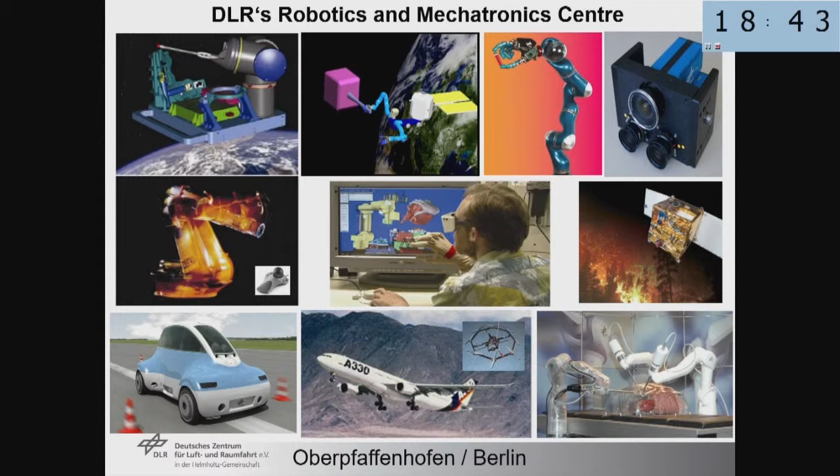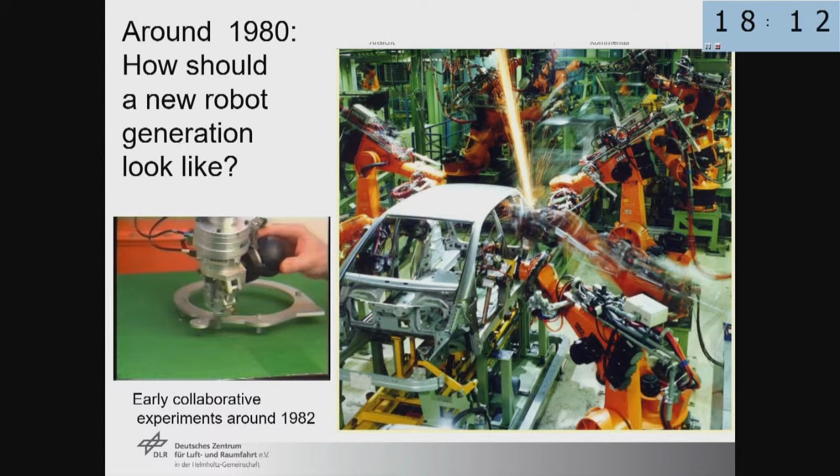Already in the early 80s, we saw that robots in the factory were behind fences. They had no sensing. They were stupid devices. We tried already at this early stage to develop robots which collaborate with humans. So we developed force sensors and force balls where we could guide the robot and show how it should press against a contour. More natural programming.

Important at that time was Neville Hogan in USA. I think he was the first one who defined the topic of impedance control, that is shaping a robot such that it should react like an artificial mass, an artificial damping, and an artificial spring. And you can do this with a force sensor at the robot wrist, if you have such an arm, and you just apply appropriate feedback.

Most well-known became Whitney's resolved rate control, where you set mass and stiffness to zero, and then you get a proportional relation between the force exerted and the velocity. So you can guide the robot around by taking it just at the force sensor.

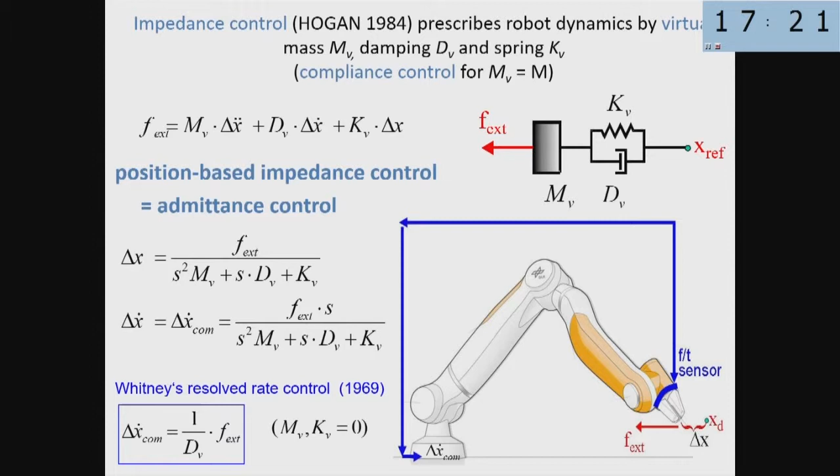Nearly at that time, we tried to define a paradigm for future autonomous mechatronic systems. You start with the intelligent motion planning. It may come from a human, or from the machine itself by using sensory information, and then you generate from that a desired motion, described as an acceleration profile, because acceleration is the mother of all physical motions - not positions, not velocity, but acceleration. And then you apply inverse kinematics dynamics model as far as you know it.

You get the nominal control commands, you put it to the real system, you have the system dynamics, you get the real motion, and you compare then the desired motion with the real motion, as you can see underneath. There will always be differences, and you have learning control algorithms that generate corrections to the commands, and on the other side, adapt permanently the model.

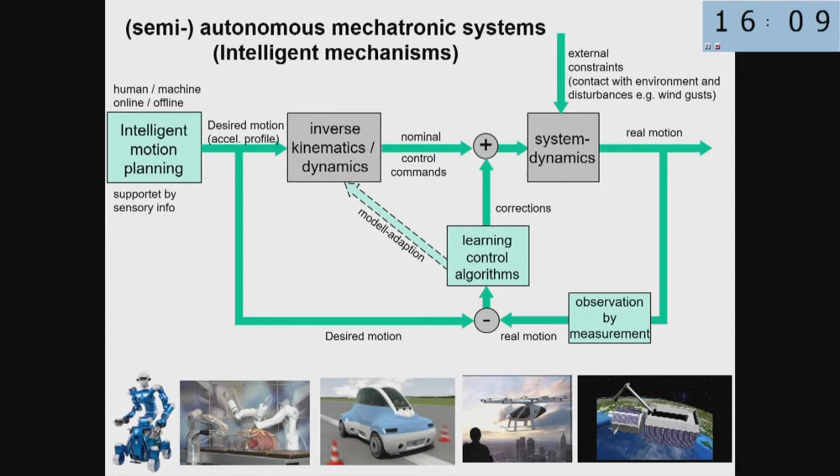This is a very general principle, usable for robots, for cars, for flying systems, for everything that is moving. And the first step then was to apply it to robot systems.

So we said, okay, desired acceleration, we need the mass matrix, inverse dynamics and kinematics model, and then we need torque control in the joints, because these are the real input commands we have - no position control, no velocity control, just joint torque control.

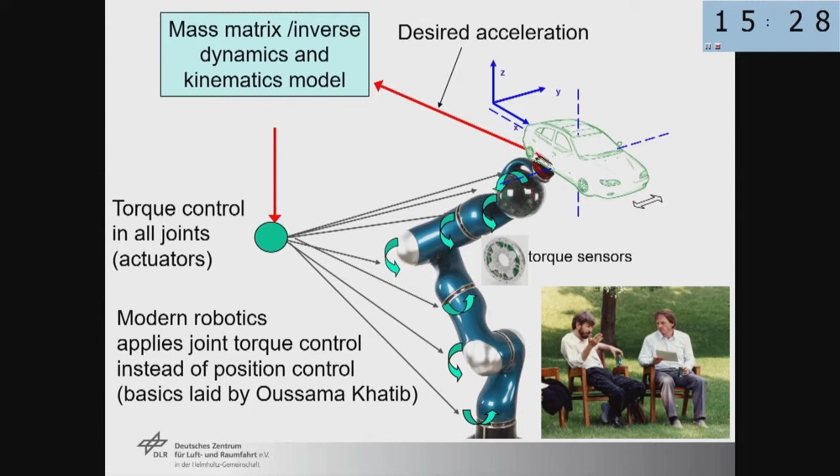A lot helped here Oussama Khatib from Stanford University, who had the first ideas in this direction also, and we had many, many discussions and said these should be the robots of the future. And indeed, I think we were the first ones who could realize this principle, when we saw that with a few lines of code you can generate completely different behavior.

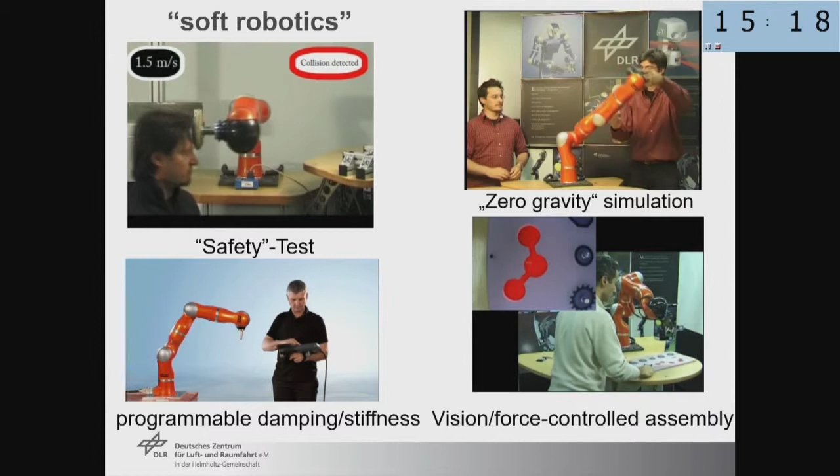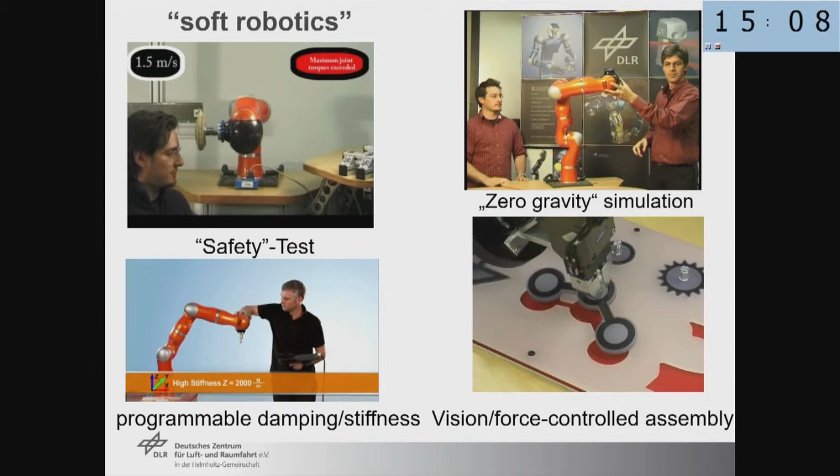Robots are absolutely safe, they compensate gravity, and if you provide them with vision, then you have more or less human performance, tactile and vision control, and we made contests with children.

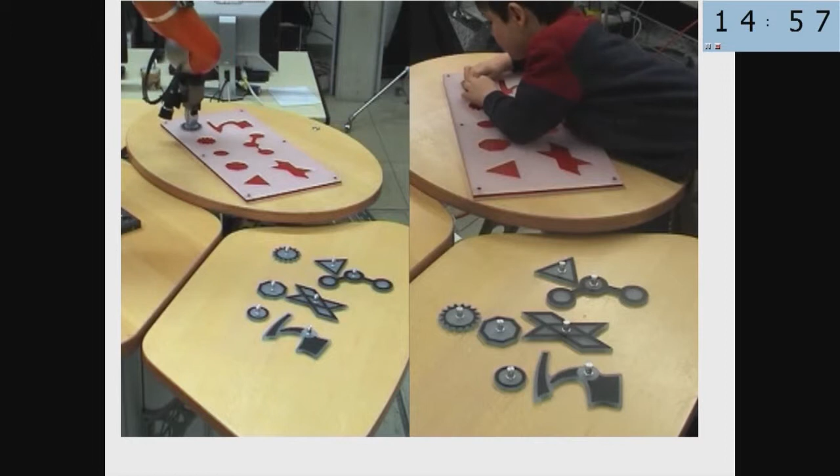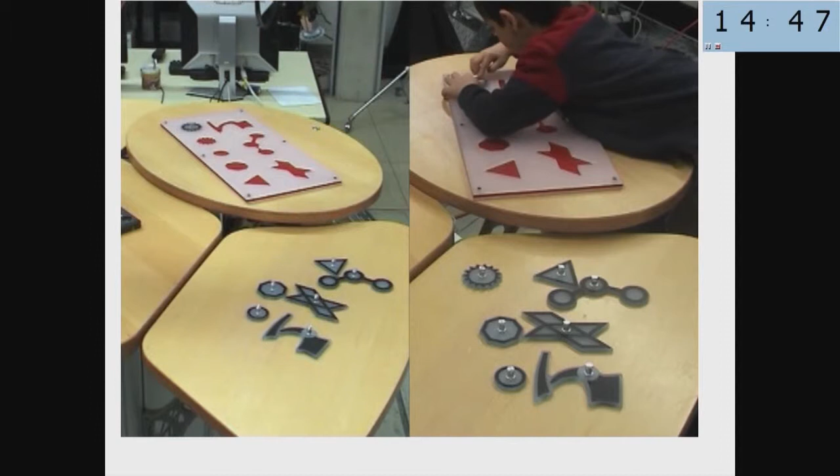For example, we have two tooth wheels which have one tooth difference, and the young guy cannot discriminate which is the right wheel, but he has now the idea it might be the wrong one, and the robot has seen it on the first glance. But then the young guy becomes faster and faster, so he is superior then to the robot. But it's not - it's just an

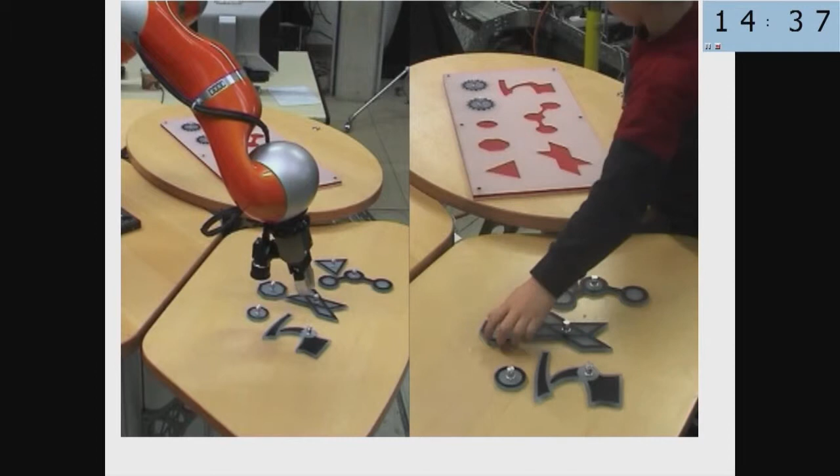intermediary stage. I think next year at the Automatica in Munich, we want to show that the robot does these insertion tasks faster than any human can do. We want to make a competition on that.

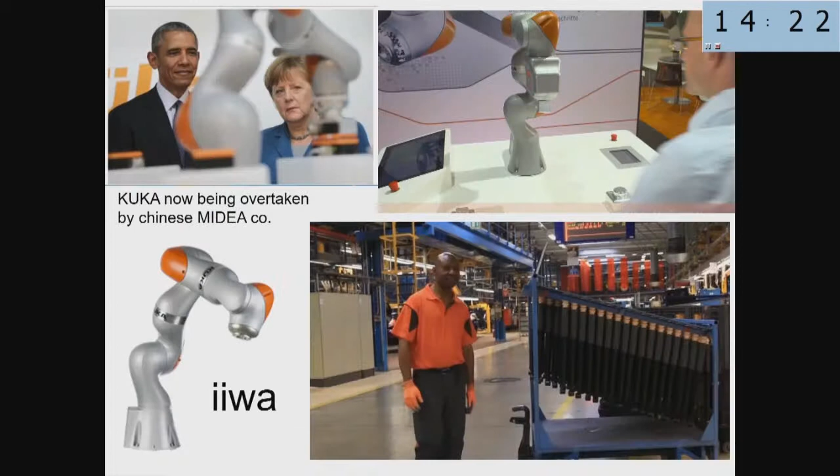Daimler was the first one who said, well, we need these cooperative robots without fences in our factory, and they assembled more than 1 million rear axle gearings with these cooperative robot systems.

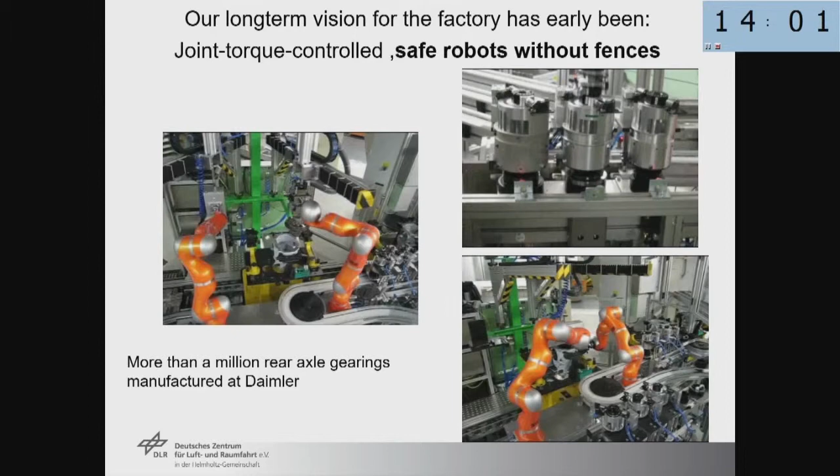And robots on a Ford production line, the company was very enthusiastic about this one, really special. He said this is a new guy, one of the first in the world to work hand in hand with assembly line staff at a car factory. The device is so clever it learns how to help you on the job, thanks to high-tech sensors that can feel when you're standing next to it.

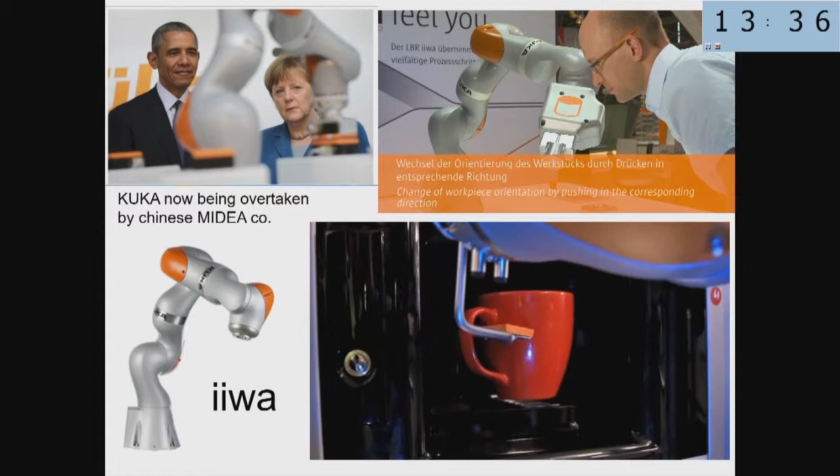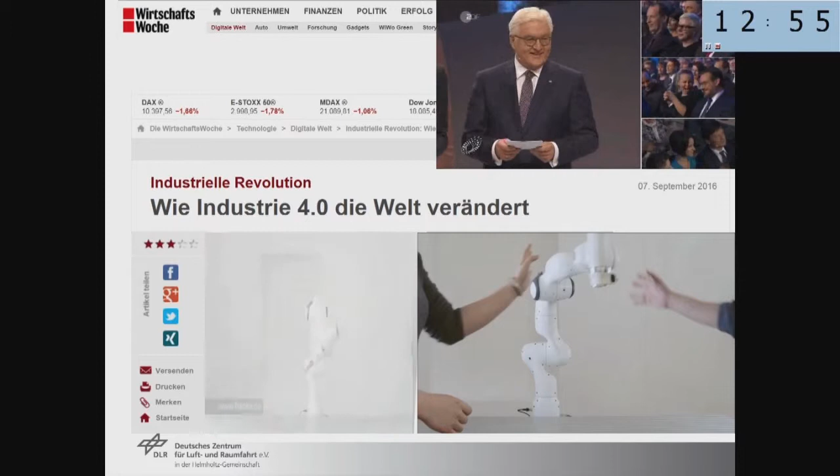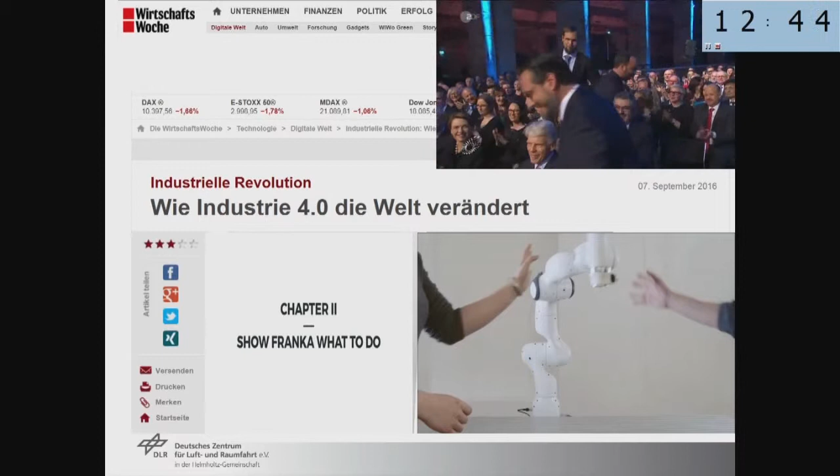So it was, but everyone said this is very cheap, 80,000 euros or dollars. And then my young co-worker Sami Haddadin developed a version which is 8 times cheaper, about 10,000 euros or dollars. And he won the German Future Award 2 years ago.

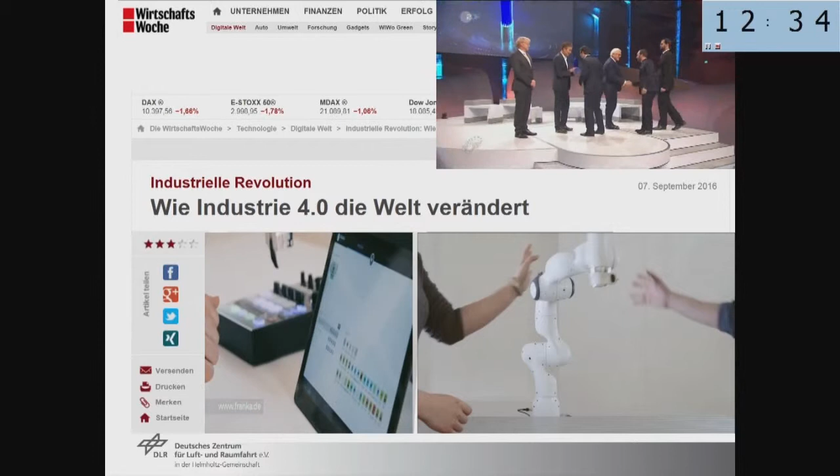And since then there's a lot of emotion about these robots. The Japanese Premier Abe pointed it out when he came to the computer fair in Germany, and we have a lot of fun with that kind of robots. They are easily programmable. They are going now to schools where young children are already programming them, and you see the idea here is learning.

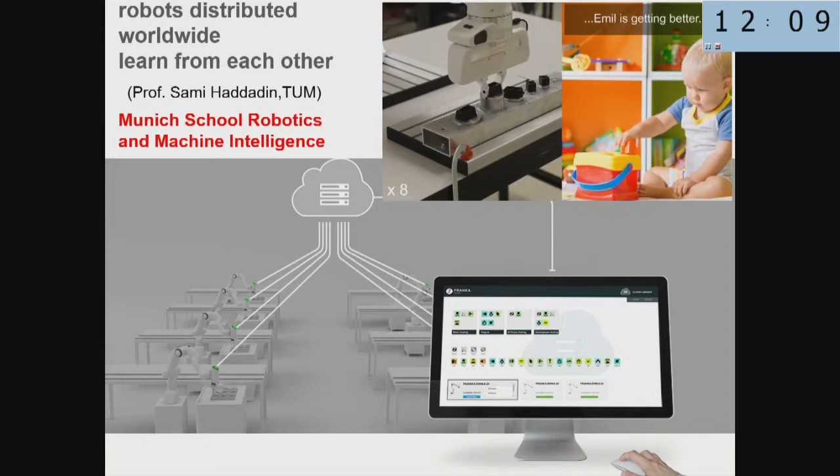Like a child, you test it again, you try it again, and finally the robot is able to insert the part, and then it tells all the other robots worldwide. The knowledge is not separated, it's distributed worldwide.

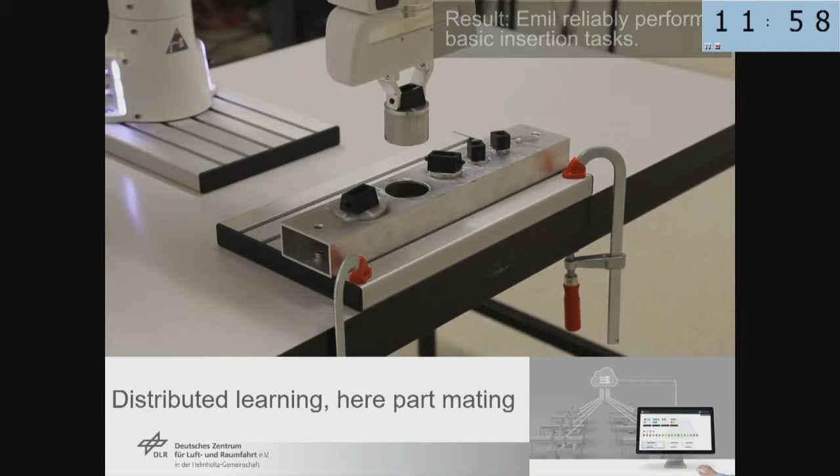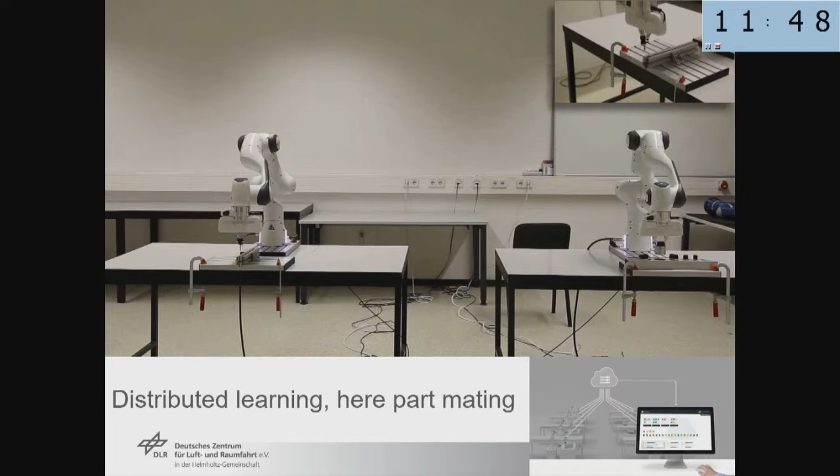And there are many other robots, for example, they do different tasks, like opening a door with a key, and immediately they have learned also to insert this key, and they can do a different task with this knowledge from the one who has just done the peg-in-hole before.

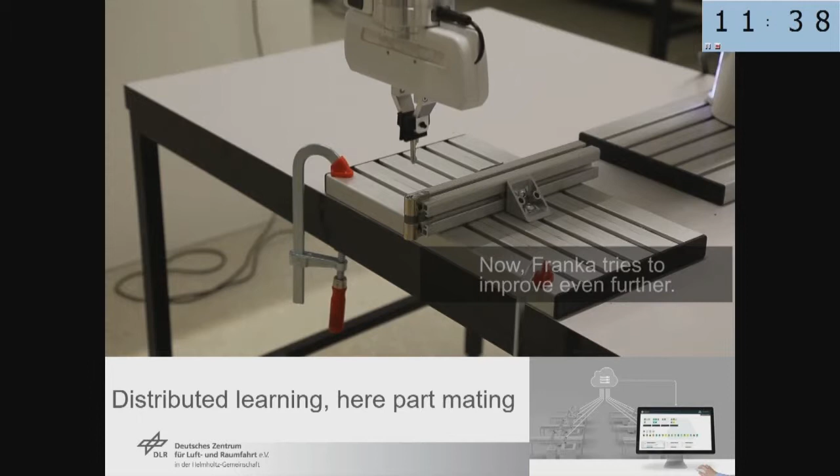So this is shown next week also to the German Chancellor. She is very interested in these kind of things, and there's a big motion at the Technical University there.

Of course, these robots address these kind of working places. A huge number of women, 80,000 for example, at Foxconn and other companies, who are doing the whole day nothing else than pressing buttons for our iPads and iPhones and so on. And you can discuss a lot whether this is useful to replace these working sites, but they will be replaced anyway.

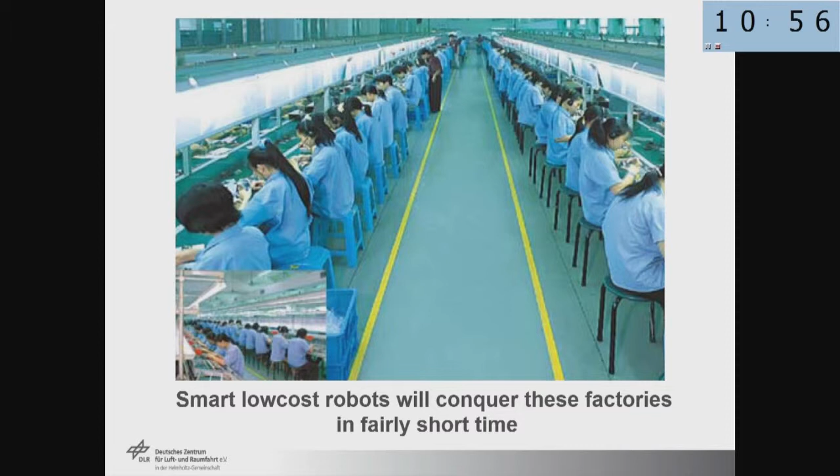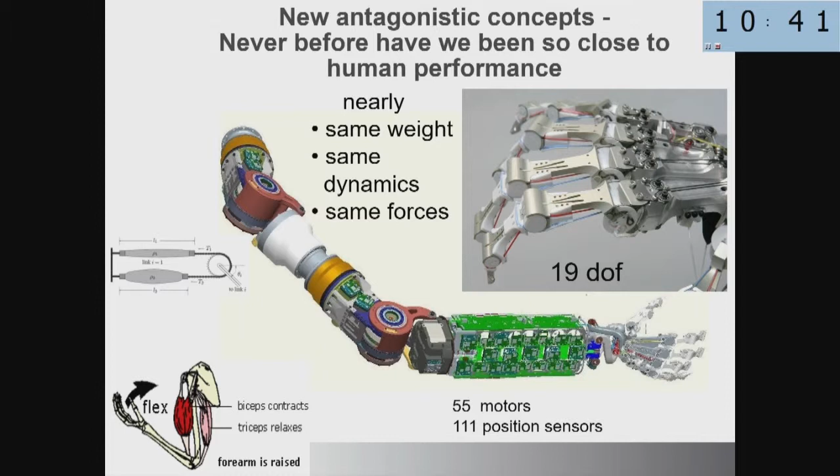We developed also more complex systems like the triceps, biceps concept, where you have 2 actuators like in the human muscular system, but then you need a lot of motors. We had 55 in this arm, but we get low weight nevertheless and very elastic or compliant behavior.

And you have typically, in the simplest version, 2 motors again, but one is changing the stiffness, one is doing the motion, and if you leave away the second motor, then you have the serial elastic joints, where the universal robot system, which is widespread, is using this concept.

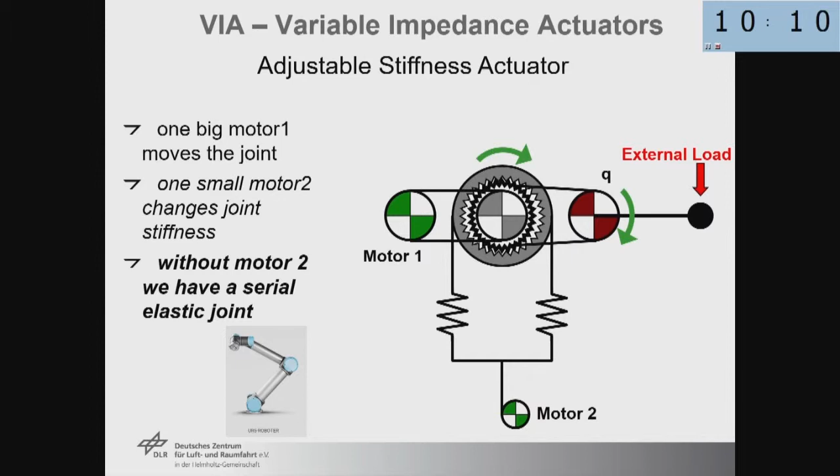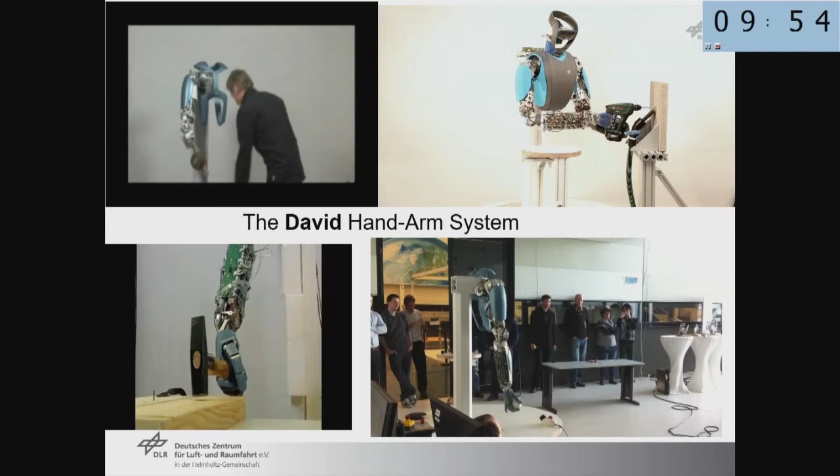The hammering like that, or this energy storage like in the right lower video, unfortunately it does not run now. Can you start it on the right? No. But drilling and so on, you need this kind of compliance, it's very important. Unfortunately, throwing the ball is very elegant, you cannot see it, because the video does not run.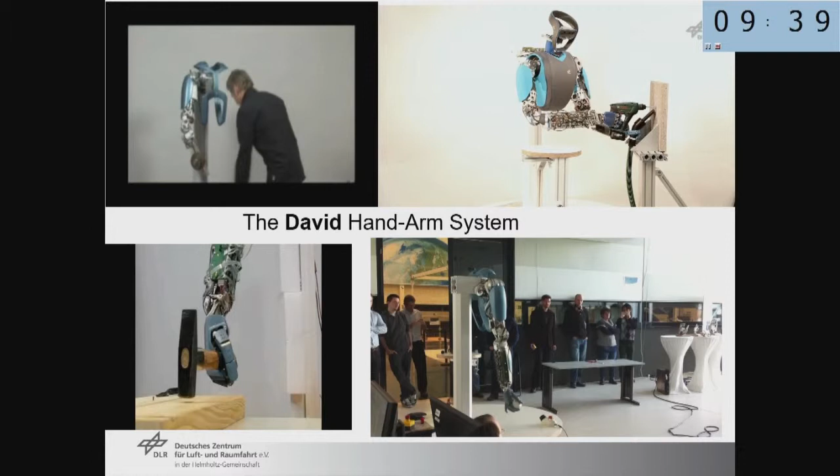There is a lot of demonstrations how robots in the future should help humans, like preparing tea for elderly, body control, and dexterity.

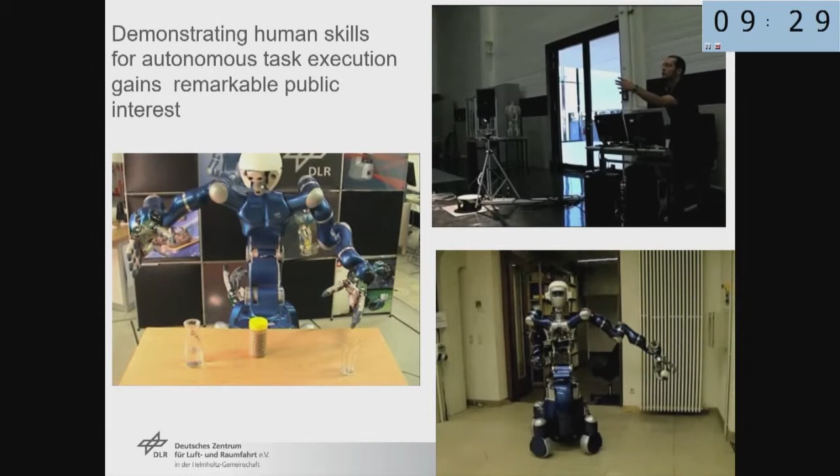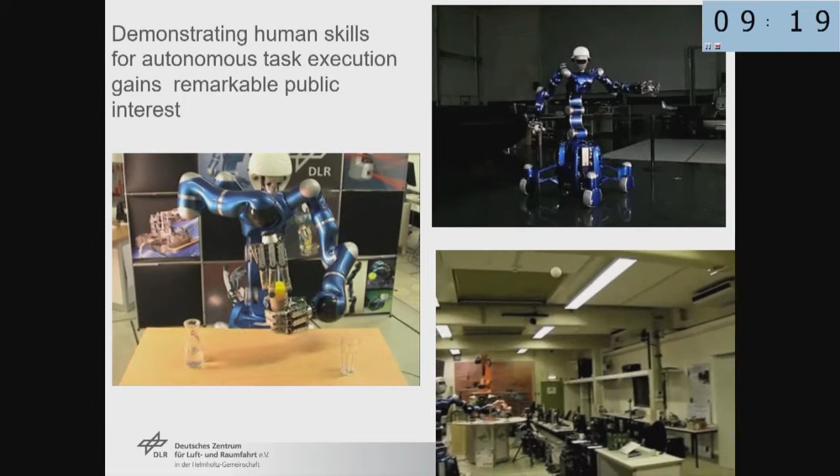Catching a ball - it's just skills which a robot should be able to do. One is throwing a ball, the other one is catching it. On the upper side you can see it's catching two balls simultaneously. Try it yourself, or with your children, or grandchildren - it's not so simple despite appearing that way.

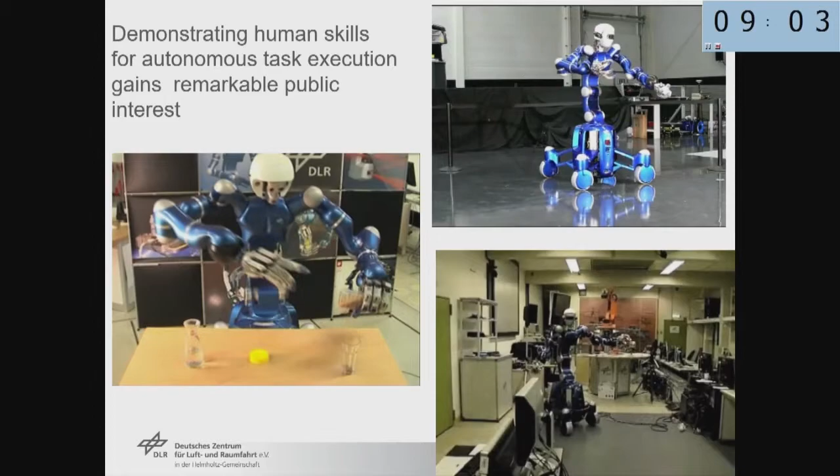There are challenges of vibrations, elasticities, and distributed sensors. People are very much interested in these kinds of things. But the learning, of course, is very interesting.

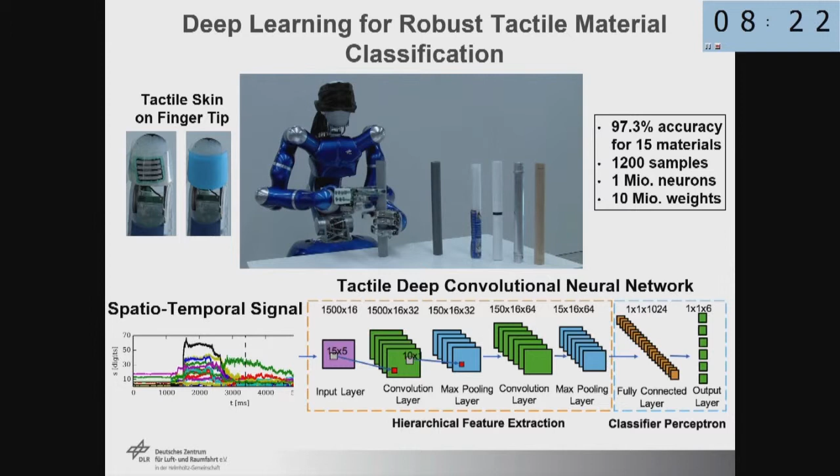We made experiments with altogether 15 tubes with different surfaces. The robot has simple tactile sensors in the fingers - it can test them by just touching and moving them around. Then we close his eyes, which is just more of a gag because we can switch off the vision system. That should be cloth and paper. Indeed, the success of the robot was higher than all of our co-workers in the institute - he was better at discriminating the materials than all our colleagues.

Nevertheless, with artificial intelligence and teleoperation, telecontrol with haptic feedback, we are talking about the tactile internet being important. We have shown that we can repair a pipeline or an oil platform in Korea. The delays of the fast internet are only half a second, and up to this half second we can compensate the tactile delays, which can make things much easier.

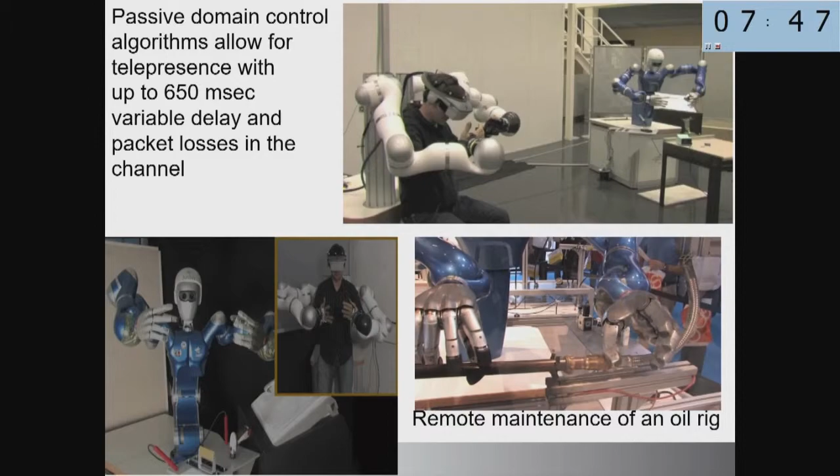Interestingly, a Russian cosmonaut on the space station had a joystick, a force-reflecting joystick. He controlled one arm of our Justin, and his wife in our laboratory felt his pressure and pressed against his arm. He had been half a year already on the space station, and she started crying - it was so emotional for her. I did not expect that.

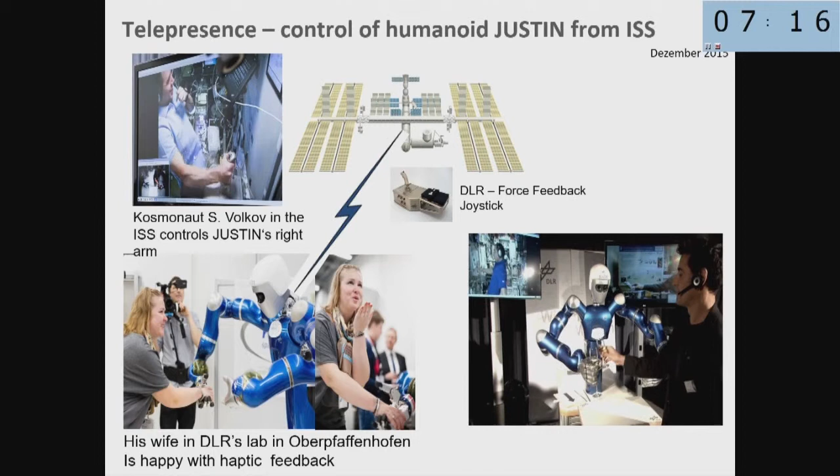From that experiment it became clear that we can now shake the hand of our grandfather in Australia, or in whatever place in the world. This is one of the interesting impacts.

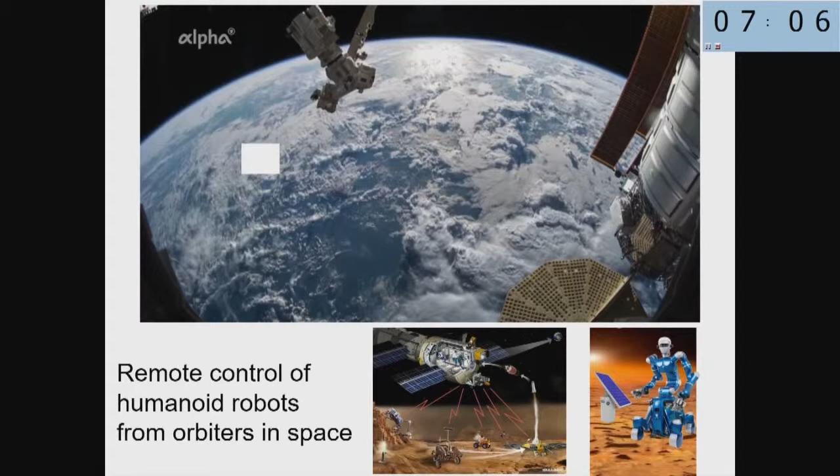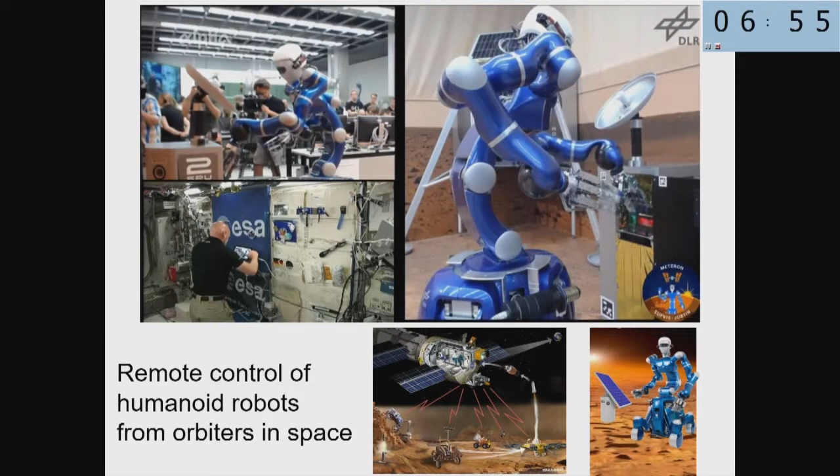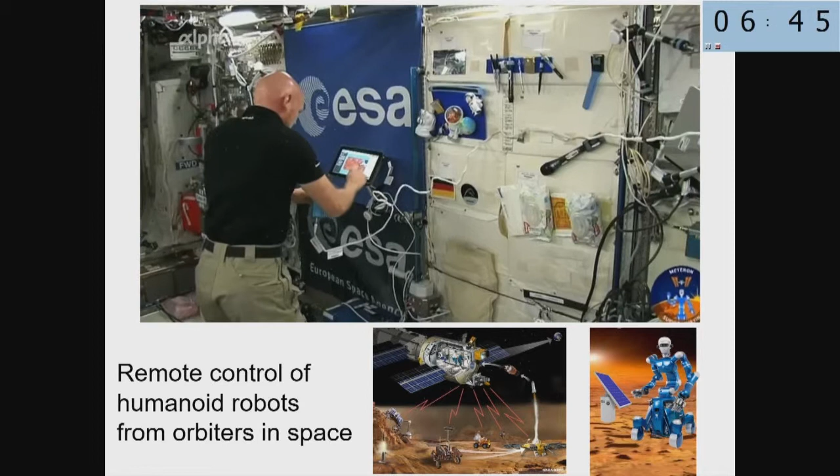Then the most popular astronaut in Germany, Alexander Gerst, did these experiments from the space station down to our lab. He had some training, not much, and our co-workers made a joke - they let it smoke, and he was surprised and said 'what happened here, it's smoking!' Our colleagues said, 'oh please take out the box and put another box in, there might be a big fire.' And he did it without training.

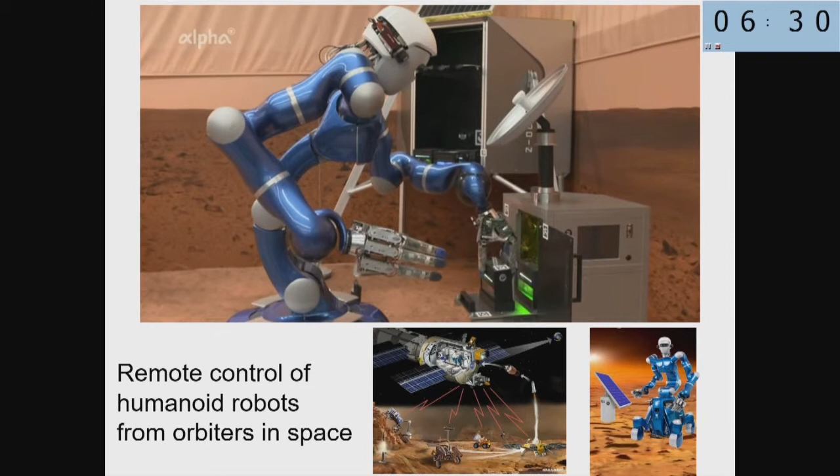So the idea is that later on, astronauts circulating around Mars will first send robots down to the Mars surface to let them build up habitats and so on, not landing at the first stage, because return from Mars is very difficult.

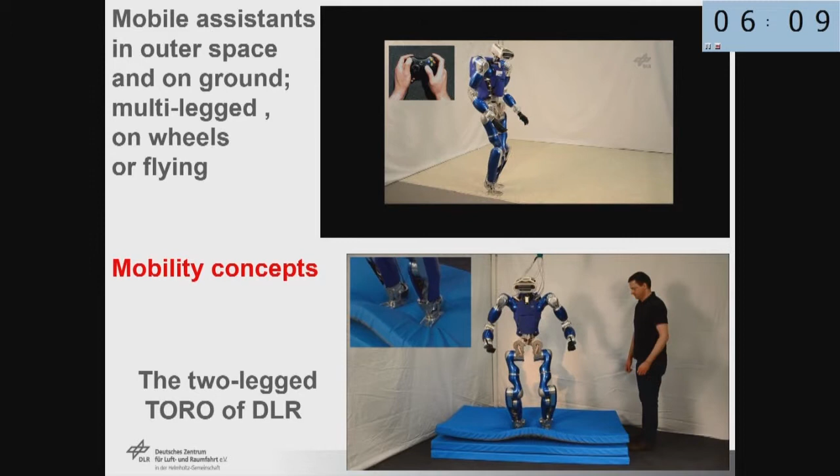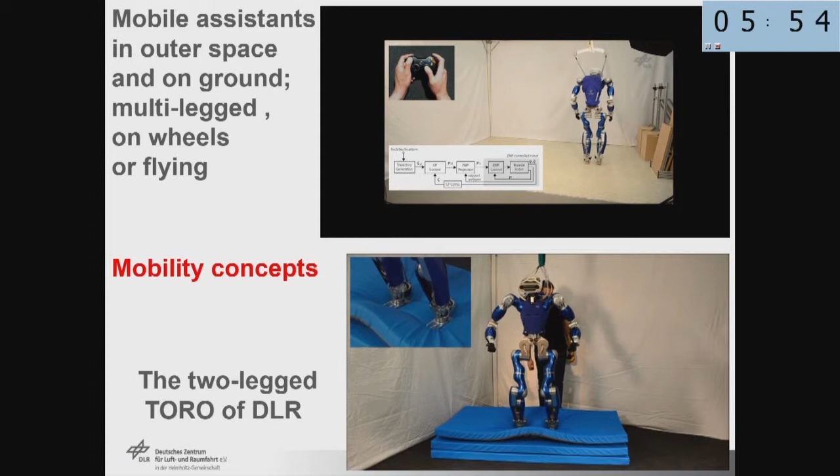Now, mobility concepts go further. Legs are important, and to be honest, we are not the champions in all areas. We are really far ahead, but concerning multi-leg systems, Boston Dynamics is the champion. Nevertheless, we have beautiful mobile robots in Europe, in France, NAO and Pepper.

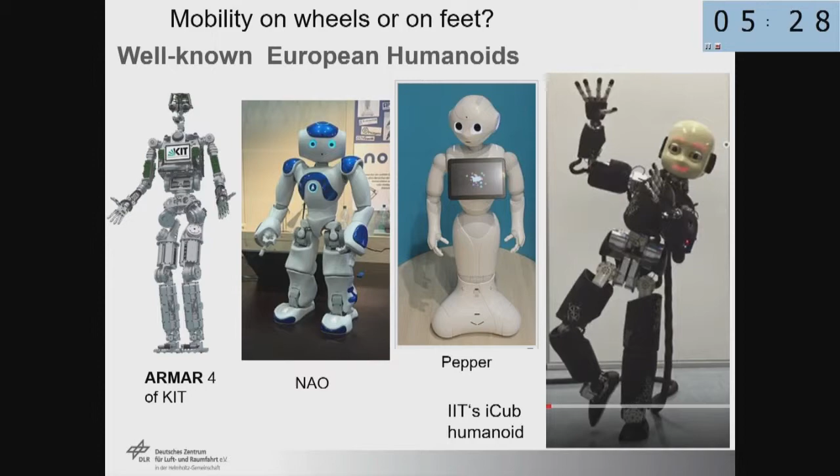A lot of people think Pepper is useful for elderly care, but it cannot help so much here. On the right side you see the Italian development, the IIT's humanoid or so. But the champion is Boston Dynamics.

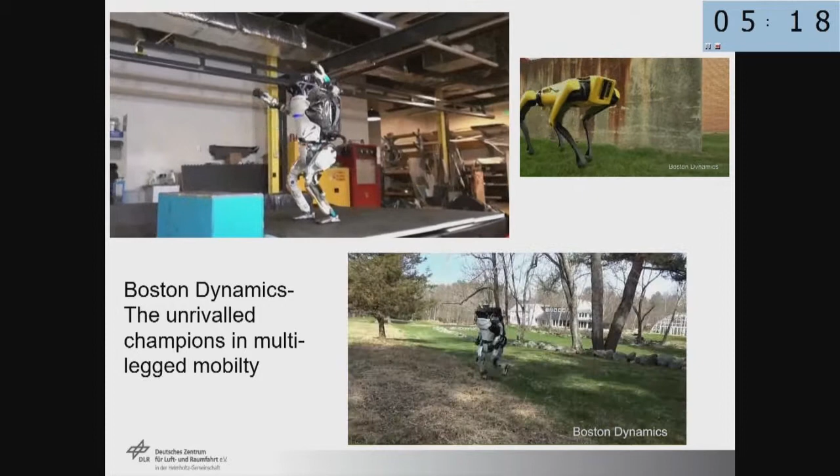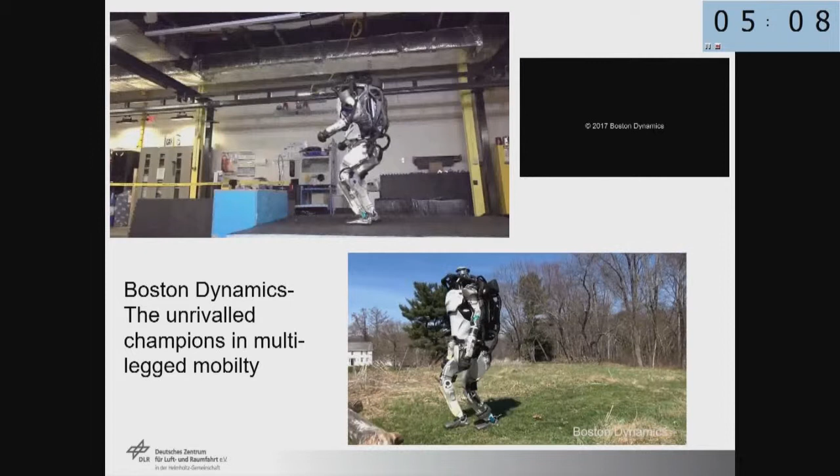They use electrohydraulic systems. On the top right, this dog, this Spot Mini, uses our motors, a pure electrical system. So for us the question is, can electrical systems be really as naturally compliant as these electrohydraulic systems? But I think Boston Dynamics is really the leader here.

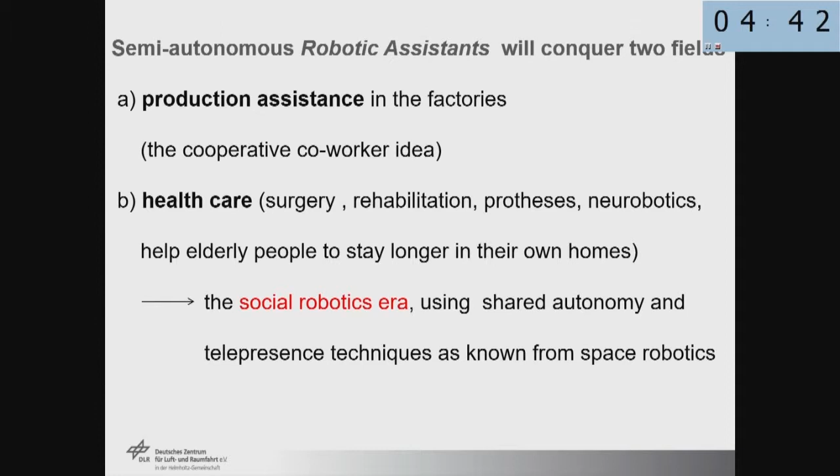Now we have a big initiative in Bavaria, pushing forward assistive robots - on one side to production assistance in factories, and on the other side to healthcare and social robotics, helping elderly people stay longer in their homes, rehabilitation, prosthesis, neurobotics.

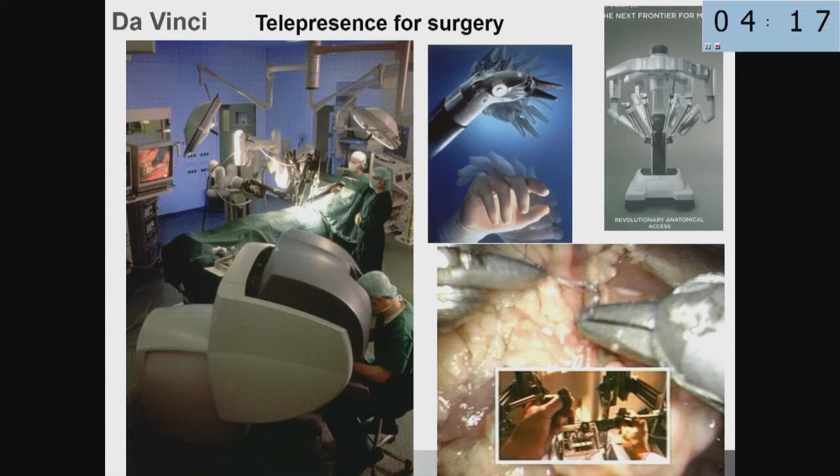You all know that in most big hospitals, operations are made by robotic systems. The Da Vinci robot is a big success, transferring the motion of hands into the interior of the body, and many clinicians operate only with these robots. We had developed a much smaller system, but we did not find a company in Germany that dared to take up the fight against the Da Vinci system.

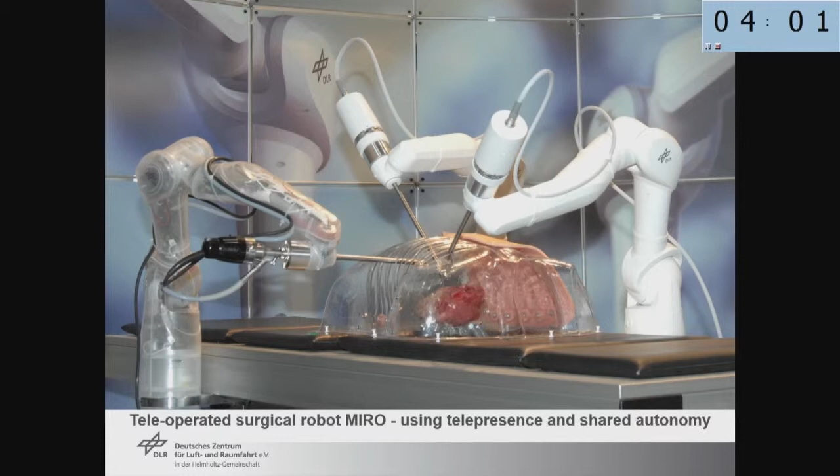Now Medtronic, a big American company, has the system in license. We will see how it will turn out, but my big hope was always the operation on the beating heart. Everything is available now - you can automatically servo the robot systems so the surgeon sees apparently a system at rest. Next steps are tactile feedback and automatically binding knots and threads and so on.

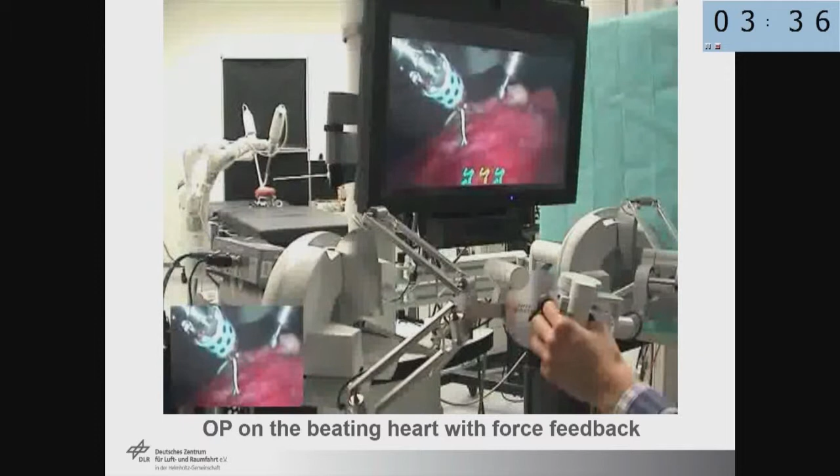The topic that interests me most at the moment - I started a big initiative in Bavaria with a school of geriatronics in Garmisch-Partenkirchen, which is a ski resort, as you may know, but has an over-aging society.

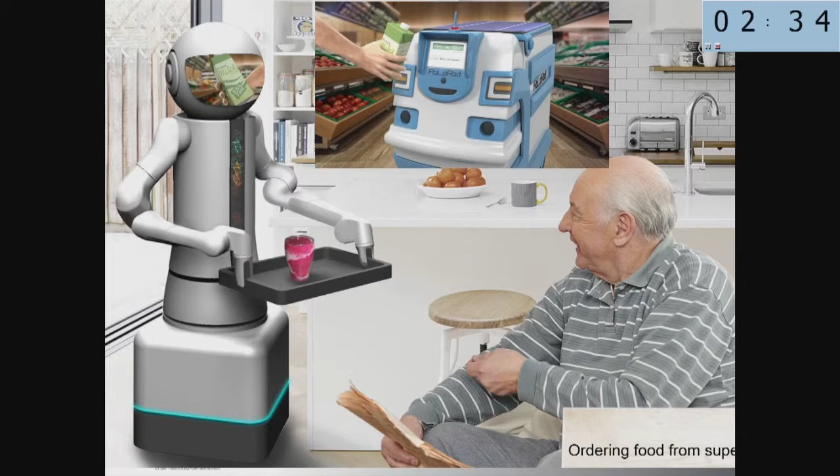The idea is to have two-arm robot assistants which make communication with children and relatives much easier, and which prepare simple meals - not complete complex cooking, just simple meals. They process vital data and only call the hospital if there is a danger. Old people are no longer necessarily sent into an old people's home if they do not want to. And ordering meals from the supermarket or the grocery uses what we call an automatic small vehicle, like a bicycle - you just order milk or whatever, and it is sent to you.

So a lot of help. All the things are basically available. We just have to do them now.

The relatives can control the robot, for example, if it doesn't succeed in lifting up glasses, or if a more complex problem occurs, then the control center, which will be in Garmisch-Partenkirchen with experienced controllers, has force feedback. They can also help.

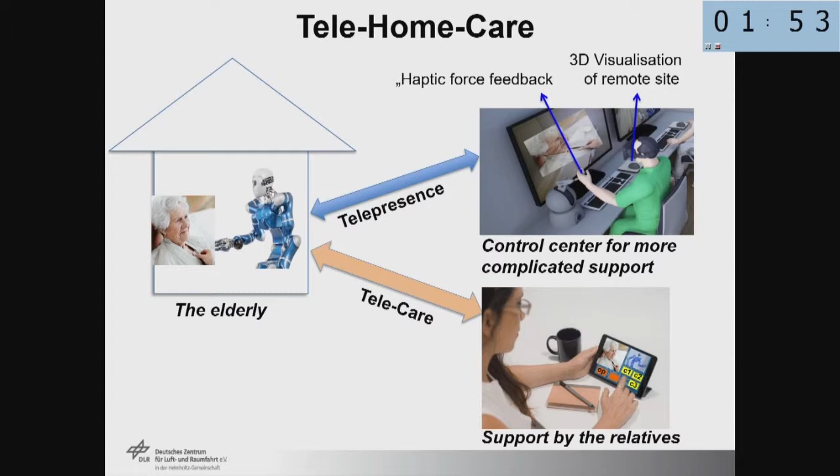The robots can shave people, as you can see, and they can also do ultrasound.

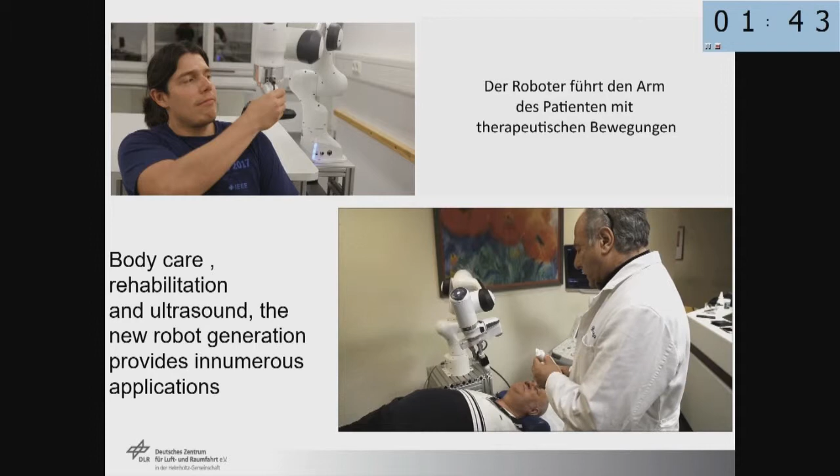I will not show it too long. On the other side, rehabilitation is a big topic for robotics. The physiotherapist comes only once, half an hour per day, and the robotic system should do the rest.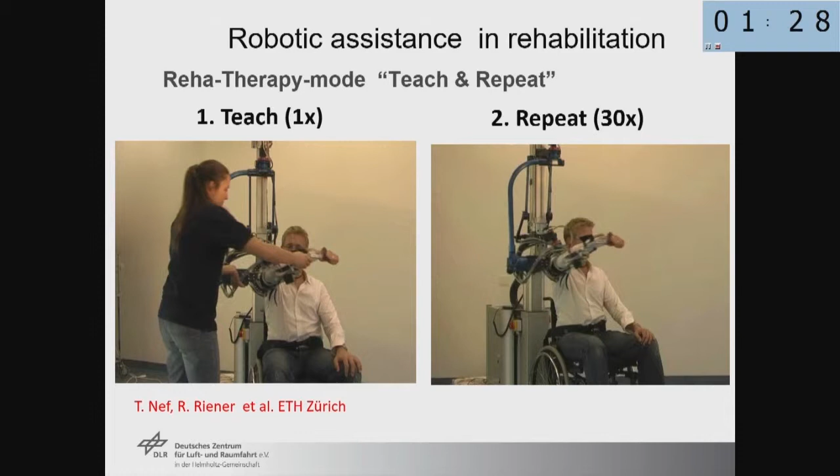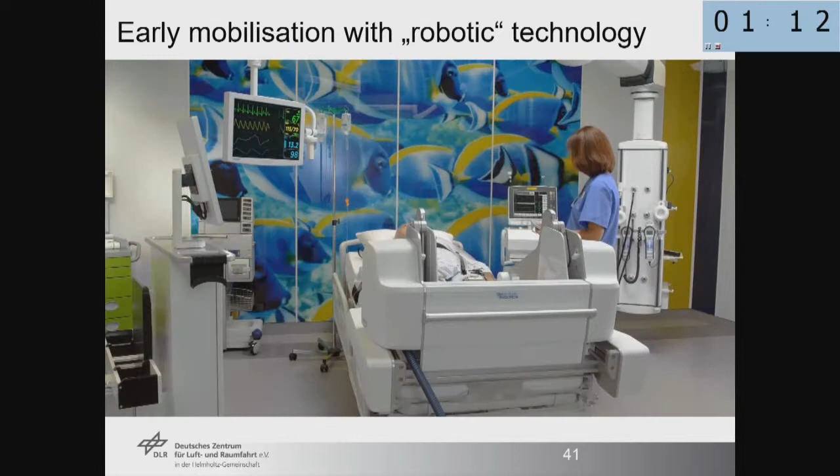We are just now introducing in the hospitals this kind of early mobilization, where again the physiotherapist does the motions once, and then the patient can by himself start moving his legs, and can also make the bed move into an upright position so that the blood goes into the legs.

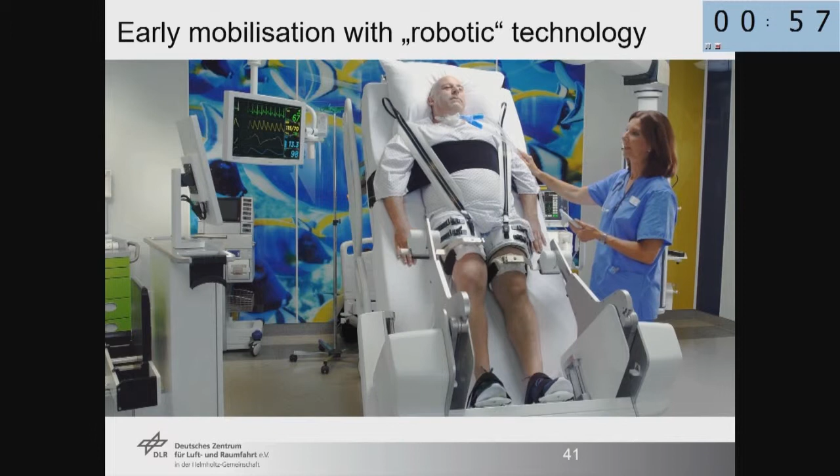So a lot of means to let people stand up again earlier - they're lying too long in their beds without motion. This is happening just in the hospitals in the next weeks, so it's interesting.

And of course, interesting are also - unfortunately the video does not run now. This is one of the most interesting videos. Can you start the video?

This experiment was done in the USA, at Brown University - we were not allowed to do it here. It uses 80 contacts to the cortex, and after 20 minutes of training, this lady, who has been paralyzed from the neck down for 15 years, was able to drink by herself. That was one of the most amazing and satisfying experiments in my professional life. You can see her face and how happy she is. This, in my opinion, is the future.

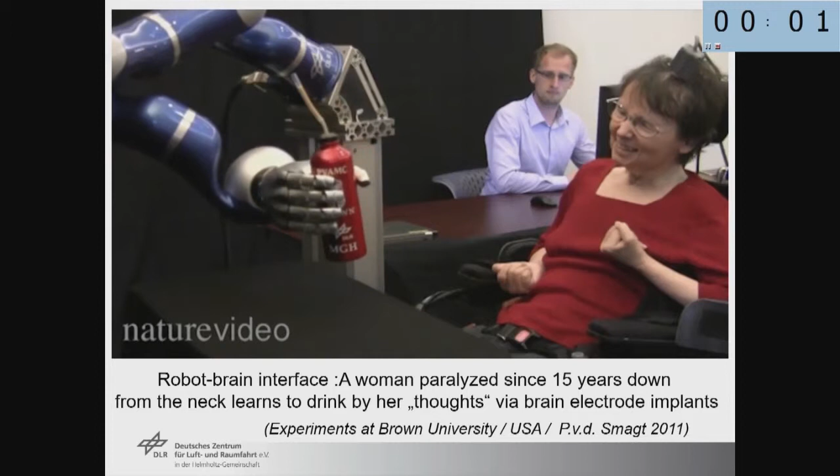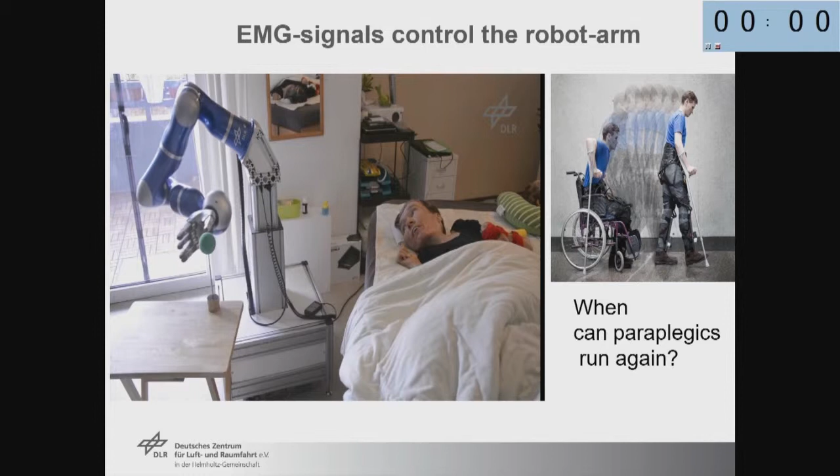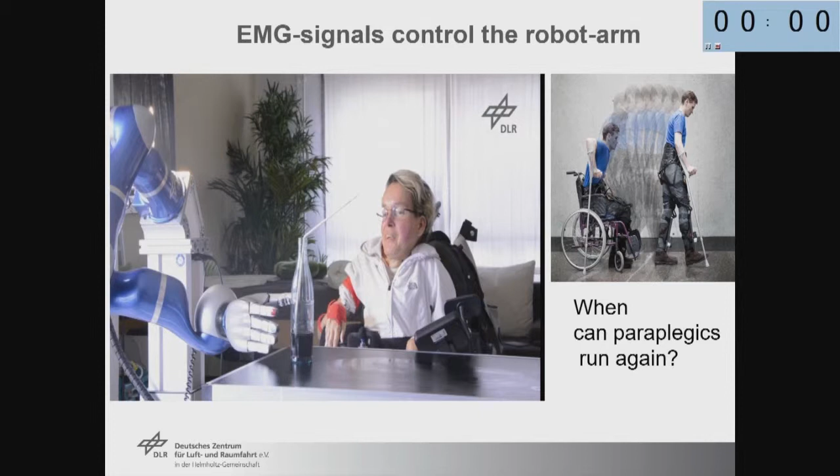We are doing many experiments with wheelchairs, where the wheelchair uses the visual system to position itself so that it can really get through the door, and then opens the door.

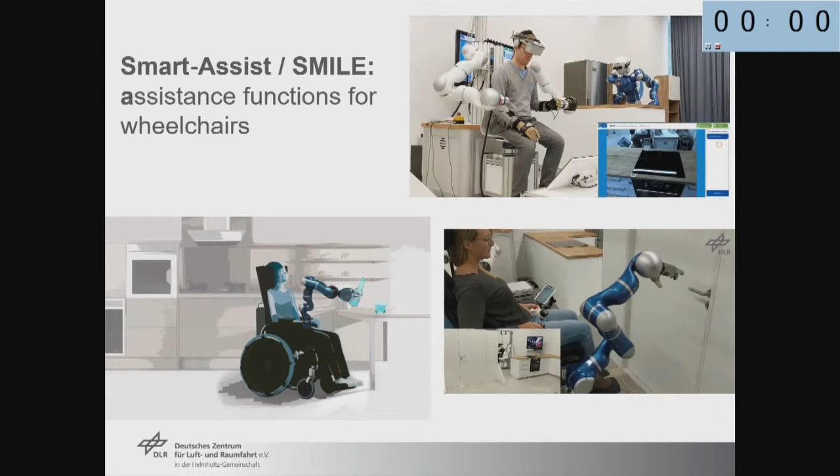On the other side, there's a remote controller that tells the robot to open the drawer, where there's medicine inside, and to take this medicine out.

There are many assistance systems. In Japan, there are exoskeletons which help workers in the factory become stronger. But for me, the real dream is to make people run again who are paraplegic, to help them stand up from their wheelchairs. If we succeed with that, then robotics is the technology for everyone in the world.